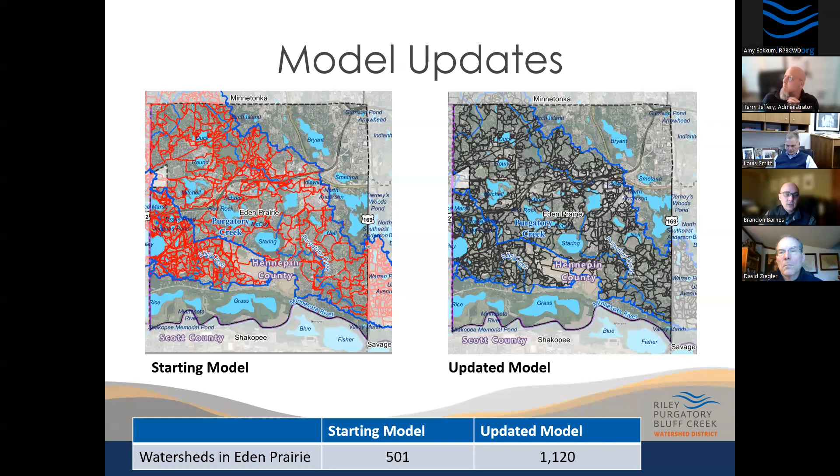That introduced new watershed divides, new storm sewer information, and new ponds. After adding that information, the next step was to validate the model so it could still simulate observed, measured water levels in creeks, lakes, ponds, and wetlands throughout the watershed district.

For this effort, the model was validated using information collected at 33 different locations shown here. The blue points are the lake monitors. The red points are high water levels that watershed district staff went out and collected in the field following rainfall events. The yellow points are smaller stormwater ponds where district staff set up temporary gauges in 2021 to collect information specifically to validate results within the city of Eden Prairie. The WOMP stations are shown in white.

I do want to pause and say the watershed district staff really did all the heavy lifting here — gathering the monitoring data, organizing it, and post-processing it so we could use it as reference to compare to the model results. They did a fantastic job with that.

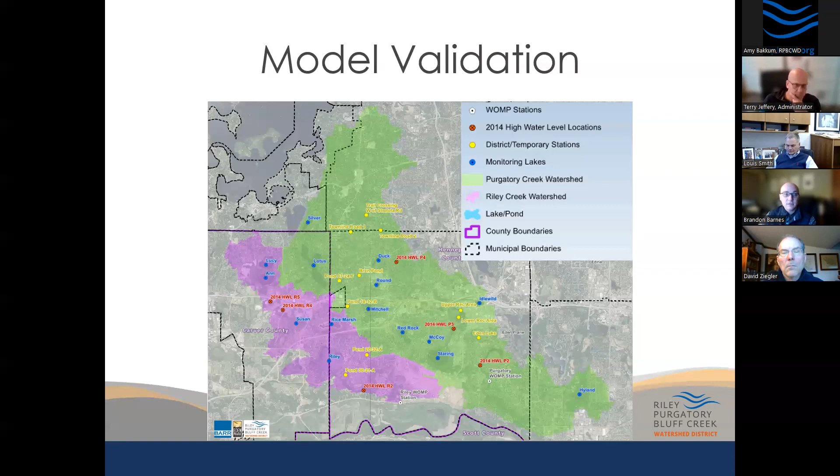This evening I'll spare you from going through all three rainfall events across 33 different locations and stepping through a whole bunch of model results, but I do want to show you a couple of sample plots so you get a feel for how the model compares, starting with a location at a smaller stormwater pond within the city of Eden Prairie.

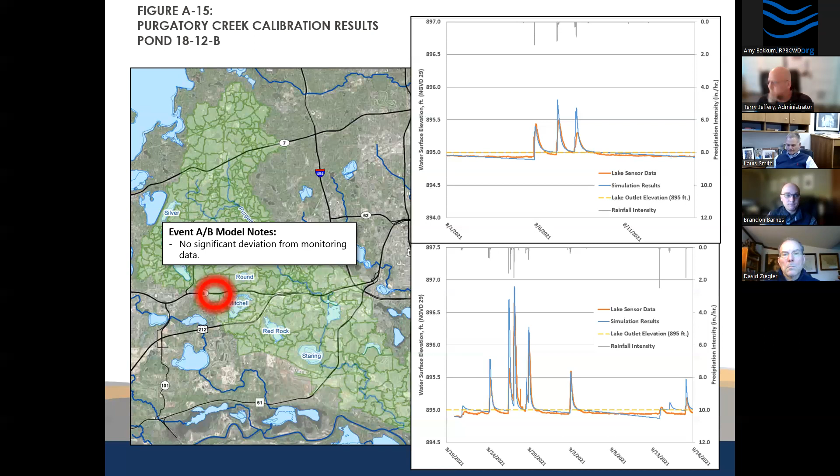One of the things I want to point out is that we reviewed these results with city staff. They provided feedback as we worked through this validation process, and we got concurrence from city staff before we proceeded to run any design events. We didn't want to simulate design events until we were confident the model was simulating what was observed and measured during the period where we had available data.

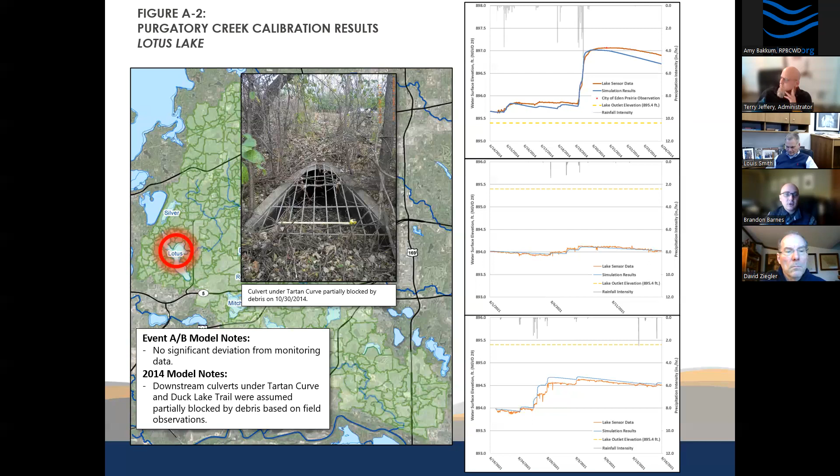After getting that concurrence, discussing with city staff, we ran a number of design events and developed inundation mapping to identify flood-prone areas, then combined that inundation mapping with building outlines to identify potentially flood-prone structures.

Before we started these updates, there were approximately 300 structures identified within the 100-year floodplain in the city of Eden Prairie. After these updates, there are approximately 400 structures. This increase is consistent with what we've seen in other locations in the watershed where we add resolution. Most of these additional structures are located around smaller ponds, topographic depressions, and wetlands, areas where prior to this update the model's resolution wasn't sufficient to capture that flood risk. Now that we've added that resolution, we're able to illustrate and quantify the flood risk in some of these smaller ponds and depressions.

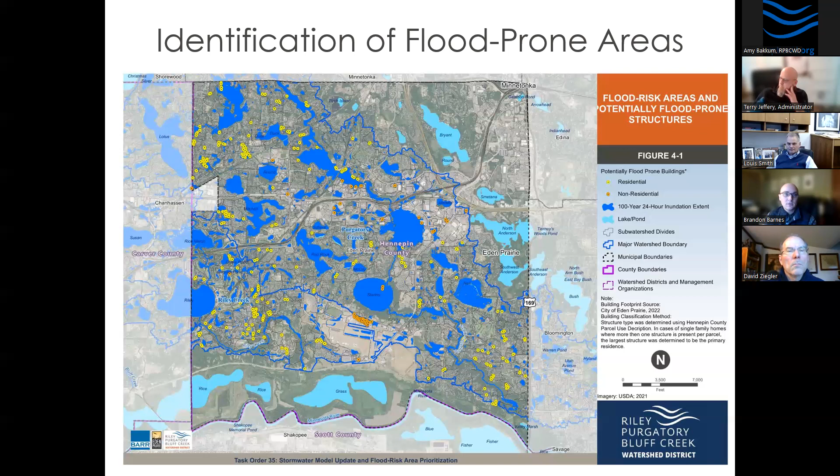That's intentional, because the intent of the prioritization effort is to identify locations where additional study or feasibility studies are needed to inform the next step. Since those additional feasibility studies haven't been completed yet, there are no costs to compare relative to each other. This framework is intended to provide direction on where to study next and how to approach further evaluation of the flood-prone areas that were identified.

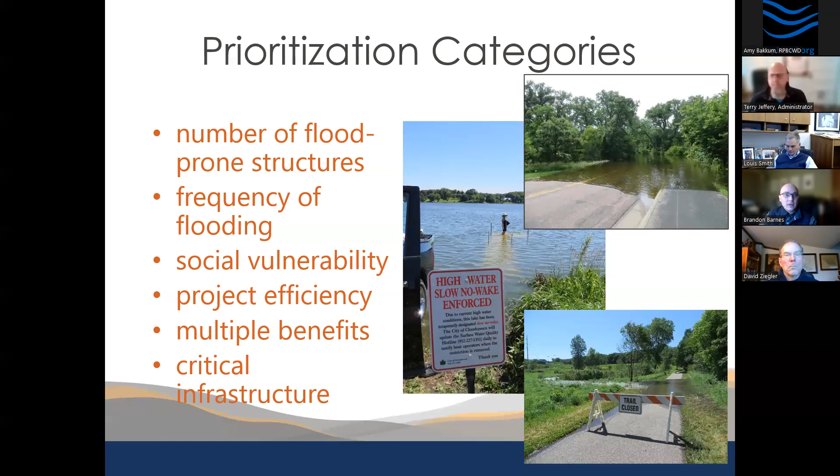These point values, these thresholds for number of structures, for how we assign those points to different areas, were all initially defined when the framework was developed, and then reviewed with City of Eden Prairie staff to make sure the scoring was applicable for the city, and that the results of the prioritization framework generally aligned with what city staff were expecting. Making sure the areas where they saw flooding kind of aligned, the areas that they know have flood prone structures generally aligned. So it was gut checked here to make sure the result of this tool aligned with what city staff experienced and what has been observed within the city.

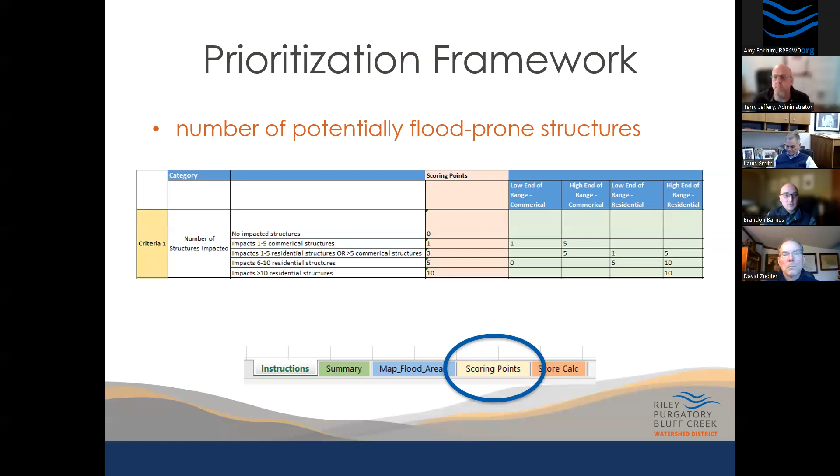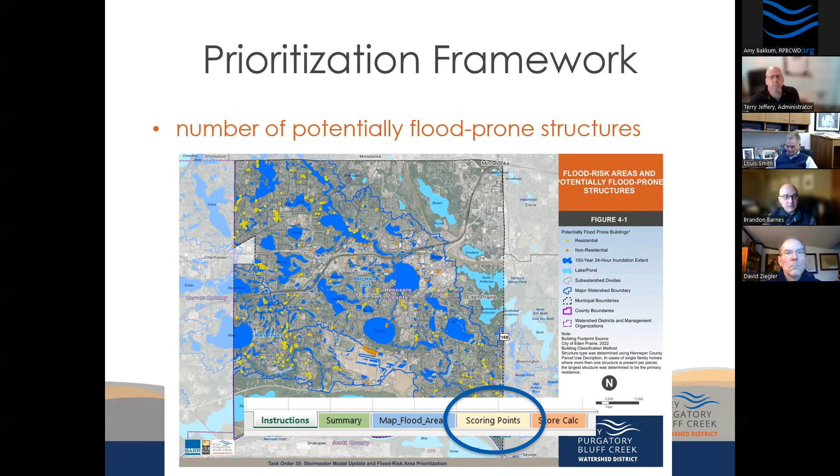So this was the flood prone structures category. Again, this goes back to the map where we identify the number of flood prone structures—there's about 400 of them within the city. Essentially each area where there is a structure identified gets a score or point value assigned to it for this particular category.

The second category is frequency of flooding. The intent with this category is that the more frequently a structure floods, the higher points that area would receive. So if an area doesn't flood during a 100-year event, there's no points assigned. Whereas if an area floods during a 2-year event, there's 10 points assigned. One of the things we talked about with city staff, but also in general,

is how we assign these point values in terms of frequency of flooding—we use that as a proxy for depth. The underlying assumption is that if it floods during a 2-year event, the depth of flooding during larger events is presumed to be deeper than if it didn't flood for those more frequent events. So you won't see depth of flooding show up in any of the categories.

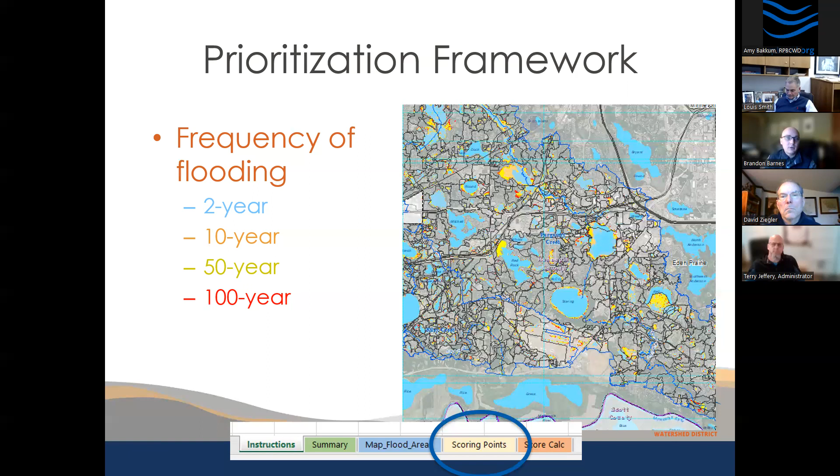The third criteria is social vulnerability. What this criteria gets at is looking at how different populations within the watershed district will have resources available to recover following a natural disaster. It's really a data set here—the social vulnerability index is the one we're referencing, based on US Census data. We're looking at different quartiles within that data set.

The idea being that populations that need additional support before, during, or after a flood event are more vulnerable populations and therefore receive a higher score, while populations that have means or are less vulnerable to recover following a flood event receive a lower score here. You can see in the background how this index varies across the watershed district.

The next category we looked at was project efficiency. This category was defined as whether a project could be supported by multiple stakeholders—so was there either a potential financial partner, or would a project meet multiple goals in both the watershed district and the city's stormwater management plan? We looked at those goals in the different plans and identified potential funding partners based on proximity to regional parks, recreational areas, and state and county transportation, roads.

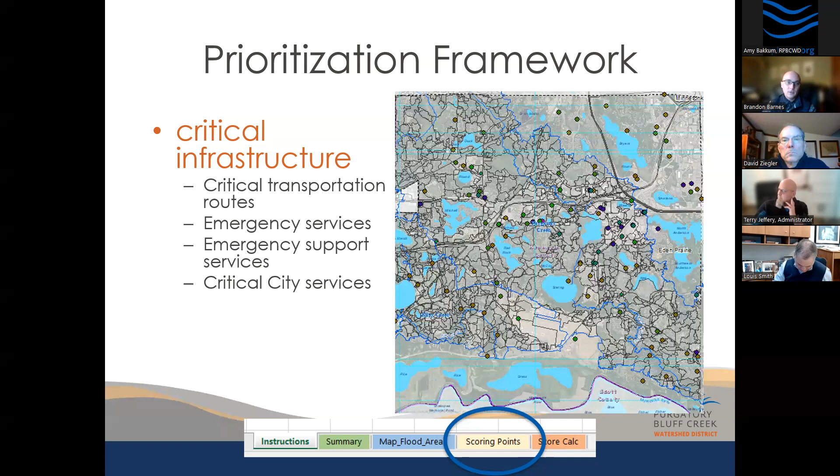For each one of those critical infrastructure points that fell within the inundation area, we assigned point values. There was no cap on the number of point values. For every piece of critical infrastructure within the floodplain, we assigned additional points.

When we run through those 6 different criteria and assign point values based on the framework and scoring assigned to each, the end result is an organized list that can be sorted, where every inundation extent or flood-prone area within the watershed district has a unique value. It can be sorted such that the lower scores indicate flood-prone areas with a general lower priority based on the categories and scoring identified.

In some instances, as we went through this, we realized it might be appropriate to overwrite a score where maybe private storm sewer data isn't available, the GIS files require updates, or there's something known to city or watershed district staff that might require an adjustment. So on the far right, there's a manual place for staff to enter notes. If scores are overwritten, the tool provides that flexibility so there's documentation tracking what the additional consideration might be.

So the overall summary table provides that list of relative priority of each area. This table can be linked dynamically to GIS so we can view these scores on a spatial scale. This figure shows a heat map of the initial prioritization that came out of this work with the city of Eden Prairie.

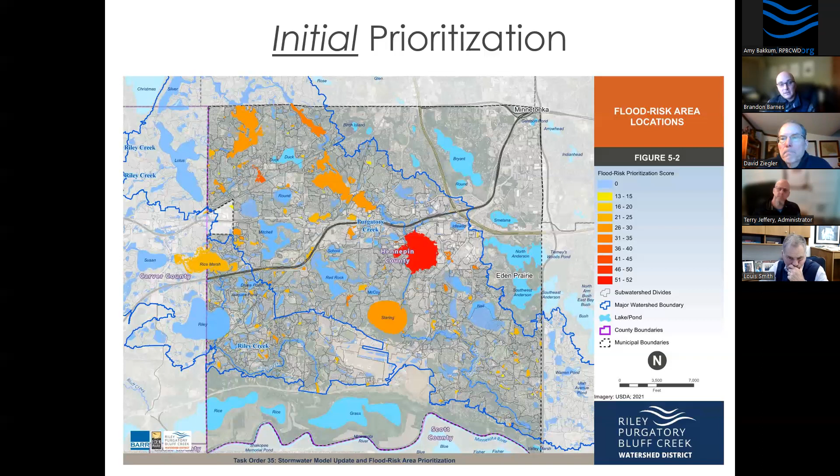Now, switching topics briefly, one of the things that came up when we were scoping the project is that the MPCA requested that we compare our findings to publicly available information.

Perhaps some of you are aware of the Flood Factor website or tool. It's a free online tool where you can go and learn if a property may be susceptible to flooding, if it is potentially at risk. It also tries to provide information on how that risk changes over time, estimate damages associated with flooding, essentially information to make communities more informed.

This website has a very similar approach and scope to what we are doing with Eden Prairie, but on a much larger scale. Because Flood Factor is looking nationwide, it has a much broader audience, so its intent is to provide general flood risk information to that broad audience, whereas the work we did with Eden Prairie was very focused.

It included very detailed site-specific information on the storm sewer system, outlet control structures, and so forth. And so with that, the work that we've done with Eden Prairie provides a much better, more detailed characterization of flood risk within Eden Prairie.

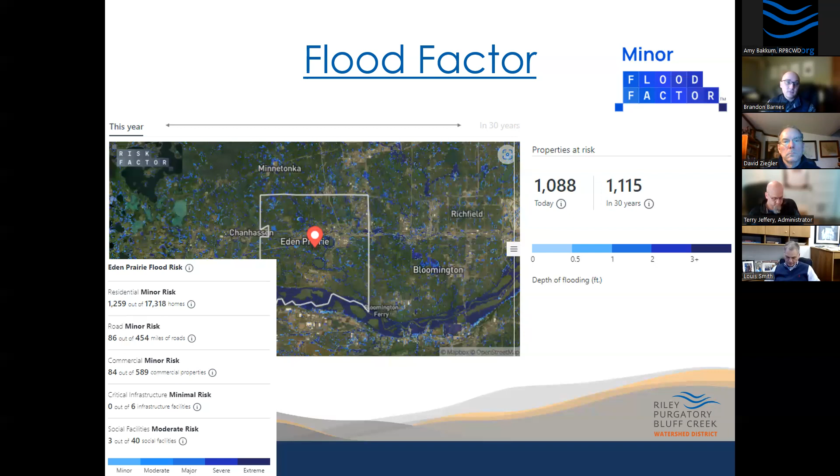If we dive in here just a little bit, here's a sample area just to the north of Lake Riley. We can compare the differences within that inset rectangle. The updated modeling and mapping that we did with the city of Eden Prairie is that top inset, and there's about 10 structures within that inset that are identified. Then the same rectangle, there's a snapshot from what Flood Factor is showing, and within there's around 17 structures shown at risk of flooding.

So you can start to get a little context for how Flood Factor is overestimating the number of structures. But in general, you can see that the general inundation locations are similar. The extents in Flood Factor are a little bit larger, and again, that's because of the national perspective, the broader audience that Flood Factor is trying to reach. They can't incorporate the really detailed site-specific information that we're incorporating with the task order that we're just wrapping up. In the report that we're preparing, we have a summary comparing these two, and this summary comparison was included at the request of the MPCA as part of the grant funding that we're completing this project under.

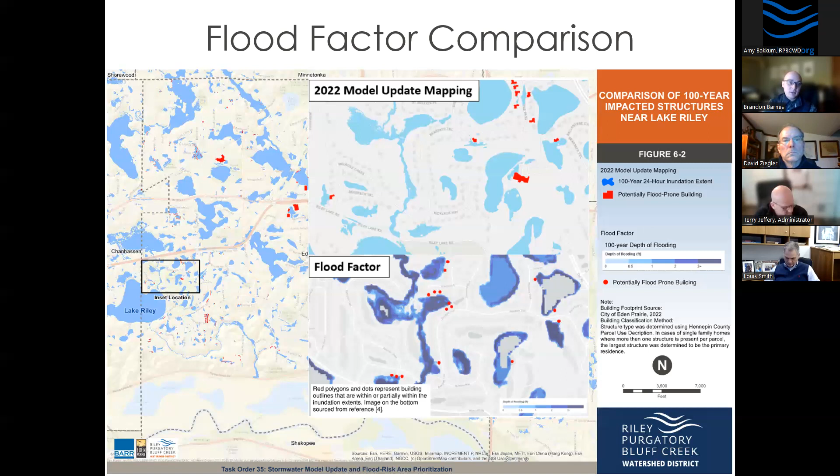So wrapping up here with a couple of next steps. This is a starting point. Now that there's a map showing hundreds of flood-prone locations, and a way to organize and sort those locations, that map might become a little less daunting. This provides information on where to begin, starting with areas at the top of the list. The next steps would be to consider completing feasibility studies for flood risk mitigation, identifying project partners, and field verifying low structures. This study was done at a desktop level based on LiDAR information, building outlines, and so forth, so field survey verification of those structures is also a next step.

In terms of this task order, we are finalizing project deliverables. Our models and report have been reviewed by city staff, and we've also completed a round of review by MPCA staff. We've addressed city staff comments, we're working on addressing comments from the MPCA, and we anticipate finalizing our deliverables next month. That's for task order 35. We've worked through this process with Bloomington, with Eden Prairie, and there's coordination with other cities within the watershed district. I touched on feasibility studies and also identifying additional funding sources for implementation of those projects.

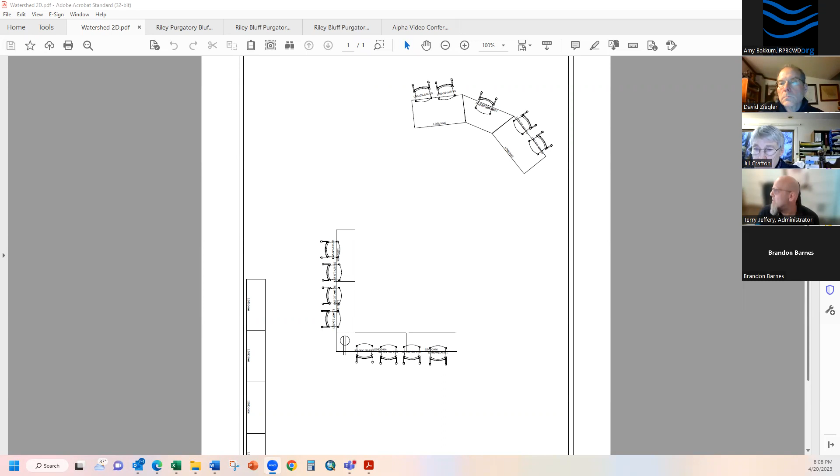So if you think of the boardroom—I know it's been a long time since anybody's been in there—the area to the top is where the projector screen is. This area in the upper left corner is the office area, where the copier and printer are. On the south is where all the staff offices are. Here's the main entrance to the building, and here's the kitchen.

In this instance, we'd have the layout for the staff. This is fairly static and where it needs to be, because one issue with this steel post construction and concrete floor is there aren't a tremendous number of sources for electrical outlets. So this is that pillar, and both tables would come off of that. The quotes don't include the electrician cost to configure this outlet to fit both tables, but this would be allowed for staff here and any other presenters.

And then we got 4 additional tables for when we have conferences or training sessions. The managers' setup is arranged this way—remember I mentioned earlier that this configuration would not allow for the 3 feet of separation between managers because of how it's set up, but it does allow for that parabolic shape.

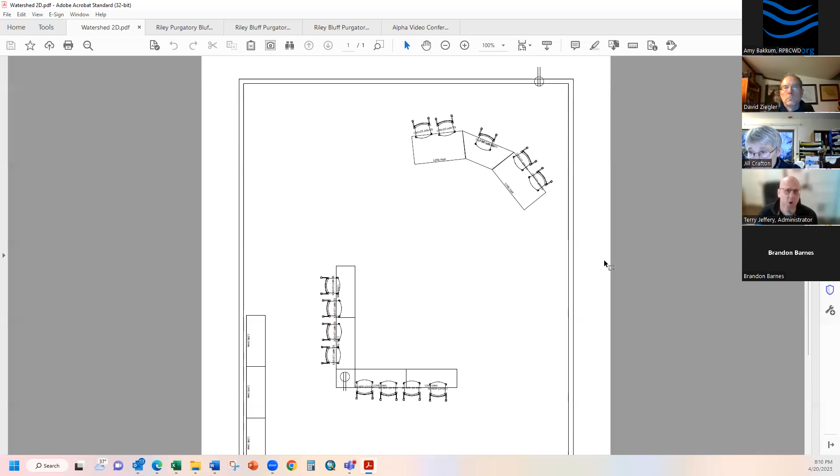So this quote came in at a total of $16,000. That was, again, not including the electrician costs, not including the tablets, but including data ports and electricity for those tables.

The second configuration is by Alternative Business Furniture, which I'll note—in this case I was able to go into their showroom and actually see the product that was going to be provided. This was of high quality, I felt, from when I was there. I can't say the same for the other product because I didn't see it firsthand; I've only been provided brochures on it.

In this scenario, same layout. Here's our screen up top, here's shelving in these areas, managers would be here, pillars would come off. This quote has 3 separate tables.

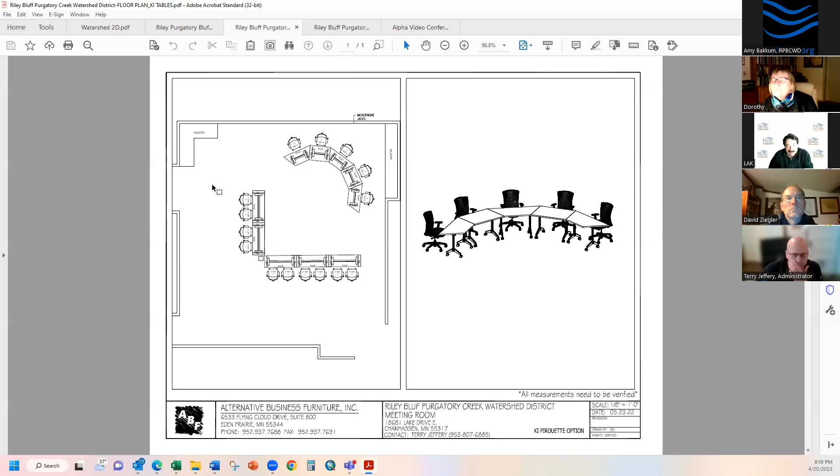My guess is most people will, unless they want to make a personal presentation, tune in by Zoom. What I'm wondering is, would we flip it around so all the managers are looking at the screen and the presentations, and the staff could be on two sides talking about it. There's nothing wrong necessarily with the public looking at our backs.

This is just not ideal for conducting a meeting and seeing the materials. I would like us facing the big screen so we could see it without having to crane our necks. Right now, the way the configuration is, there's nothing per se wrong with it, it's just that we can't see the big screen. You could get a 72-inch TV, but I don't know that's a substitute for our screen, or maybe we get a bigger screen.

Basically hang it on that post, you know what I'm saying? So it would be on the post. We could have a screen there that the managers could be looking at. At least we'd have something large enough that we could see. So that's the thing I want to see - I want to be able to see what the presentations are.

I like the idea of the semicircle because I can see the rest of the managers' faces. That's one of the things I do like about Zoom - we can see everybody's faces and facial expressions and whether they're awake, asleep, or other characteristics. So I don't know if you have any thoughts about that.

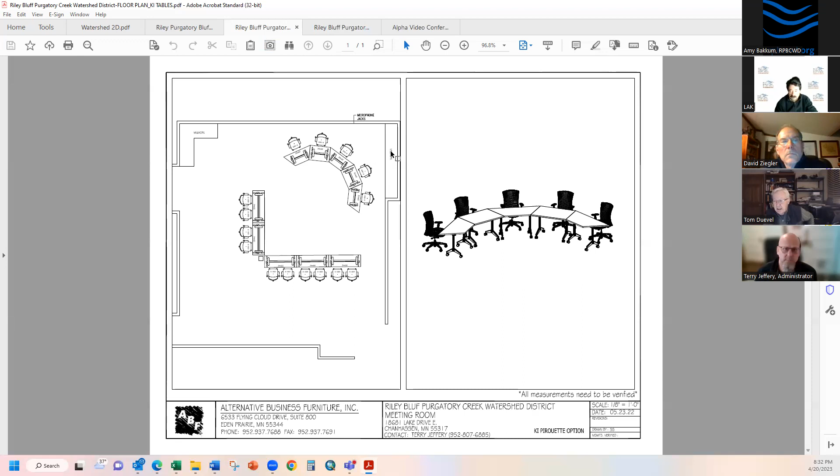Sorry, Manager Paul—so if we had 8 CAC members and a half a dozen members from the public, where would they be in this configuration? We would have to align tables in such a way that we'd space them out in this area back here. Or just folding chairs? We don't have folding chairs, but we have chairs that sit on rolling racks that we wheel in and out of the garage for meetings. But there's no reason for tables necessarily. Correct, yeah. Okay, thank you.

Okay, are we done with this item? Was there anything more on our agenda?

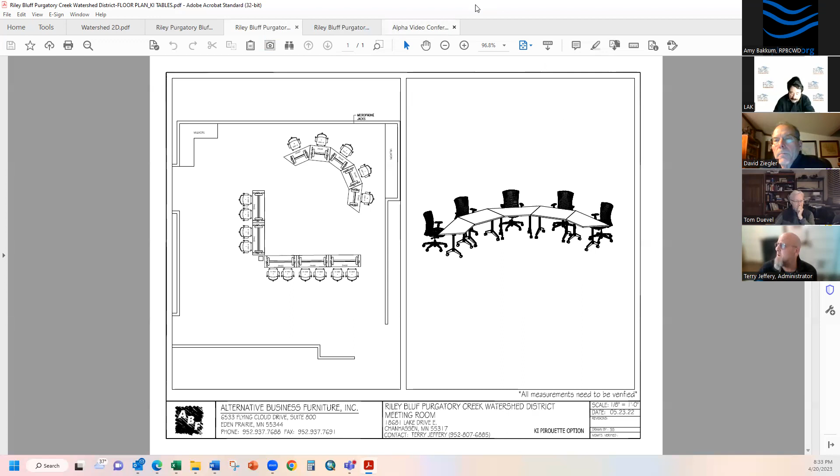Just a quick update on projects we're at—real quick, I'll run down them. There isn't a tremendous amount of change at this point. Engineer Sobiech has developed a spreadsheet that summarizes where we're at with the status, and I'll have that available starting at the next meeting. We are also working with legal counsel right now to develop more of a Gantt chart type of thing—not only the next step in the project, but who's going to be responsible for that step, and when the deadline is. So for instance, if we know we want to order the project at our August meeting, when do we have to have the open house? When do we have to have everything? So we're working on that.

The rest of it right now—snow has finally melted, so we'll get the rest of the survey for the Upper Riley Creek project. That's the one extending from Highway 5 down to Lake Susan. Design is done to that point, excepting the survey work. I am reaching out to the individual property owners along that route to gain right of entry to go onto the property for survey work, and to start introducing to them the concept that we'll need a more permanent right of entry to maintain any improvements that are done.

Bluff Creek, we talked about the culvert at the other meeting. I think it was pretty much unanimous that it didn't make sense to spend that much money. However, the city of Chanhassen did talk to MnDOT and the county to see if there was additional funding, and as we suspected, they really weren't interested in additional funding. So that isn't going really anywhere.